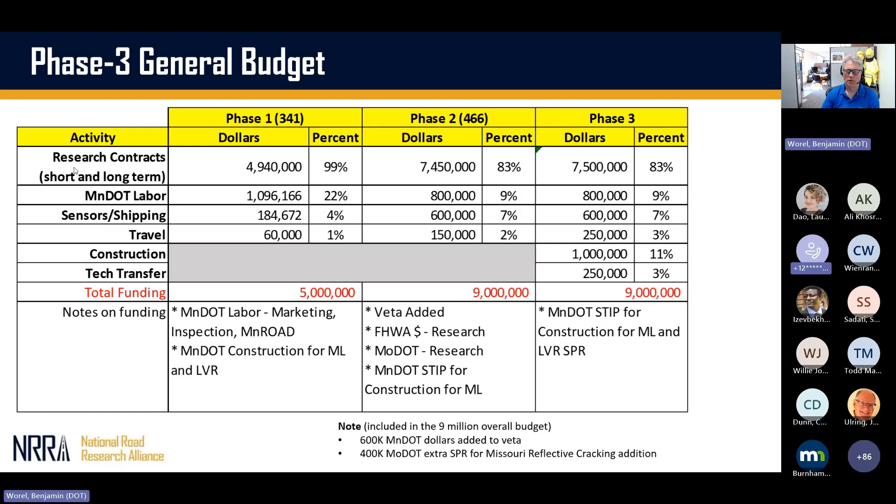The last thing I wanted to add was related to construction. We set a deadline of December 2025 for next year's construction, to get ideas in. This allows us to do contracting and different things so we're not rushing to put things together. We had a successful fall where Michael Vrtis, Jacob Calvert, and everyone here at MnRoad did a nice job pulling together different additives on the low volume road, along with a fabric interlayer, doing a reflective cracking challenge on the low volume road this fall, where the old Rejuvenator test sections were spray rejuvenators.

But we're looking for ideas for next year - again, the opportunities on the low volume road should be for 2026. We've got that type of drawing, but then for 2027, the low volume road and the main line will be opened up for ideas or construction. So that's what I wanted to mention real quick.

I don't want to take too much time because there's some good stuff to be shared through the teams. Anything else, Tom, you want to add, since you raised your hand a little while ago?

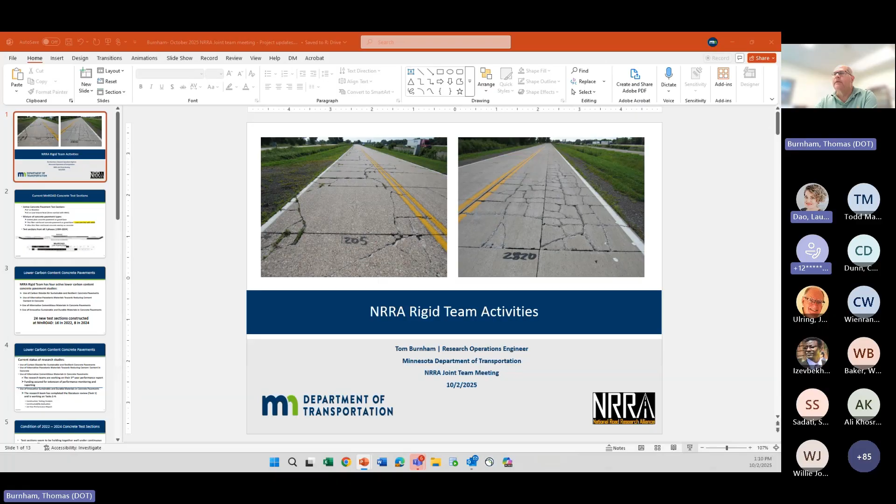Hey Tom, you're not in presentation mode. Oh, no. I forgot to add some - why Tom's doing this, I want to go ahead.

Thank Caterpillar too for the asphalt paving, and the different companies we worked with for paving those test sections.

You know what, we could go to the PM if you wanted. Yeah, why don't you do that? And let me get - okay, my - let's system. Go to the - sorry about that. Let's go to the PM. Yeah, all right.

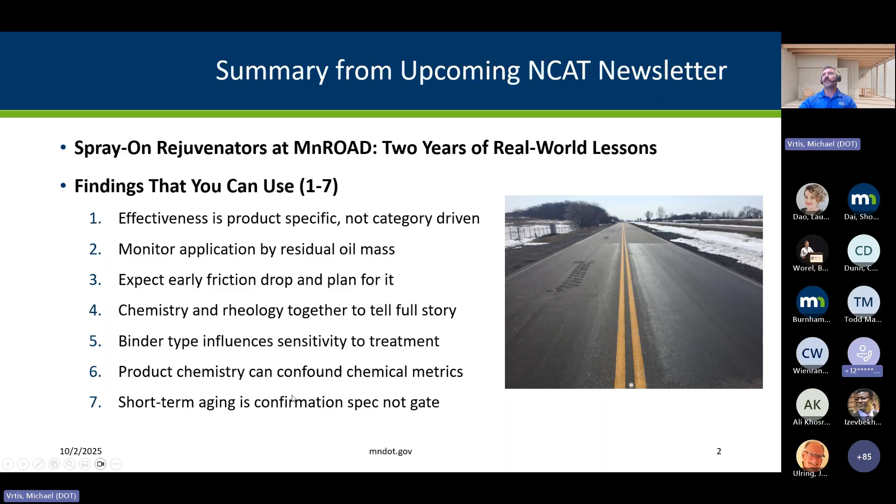Binder types, I just covered that one. Product chemistry can confound chemical metrics, I'll talk more about that on the next slide. And short-term aging is a confirmation spec, not a gate.

How to use on your next project: specify residual oil mass, use two-stage acceptance, plan for safety, match product to site, and then back to the chemical indices. Interpret with awareness of solvent effects, and avoid overemphasis on SARA fractionation.

SARA fractionation, the saturates, aromatics, asphaltenes, and resins, uses a solvent to break up the asphalt into those individual components. That solvent has an influence, especially with bio-based binders, on the breakdown and how each of those individual components are sorted out. So use complementary indices or indicators like FTIR.

I really liked the bottom line summary, and I apologize for reading this word for word, but I think it's well said. Spray-on rejuvenators can extend surface life, but success depends on matching product and retained dose to the pavement and verifying performance over time. Focus specs on residual oil mass, plan for early friction management, and evaluate chemical and rheological behavior together. With these steps, agencies can turn a promising treatment into a reliable preservation tool.

So again, thanks to NCAT and Hoegh for the work on this project and all the participants, and I'll turn it back over to Joel.

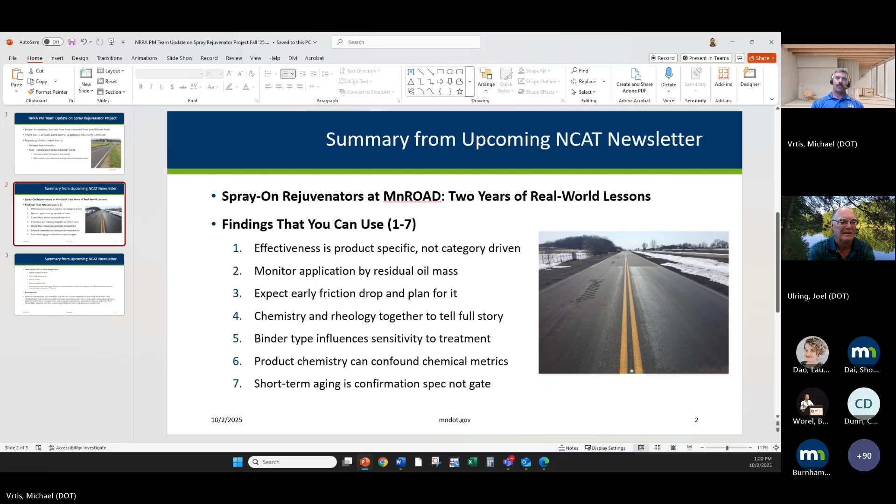I'm fine if there's short questions now. Otherwise, I think any longer discussions we should hold. Sure, but we do have time for a couple of short questions if anybody has any. All right, hearing none, we'll move on.

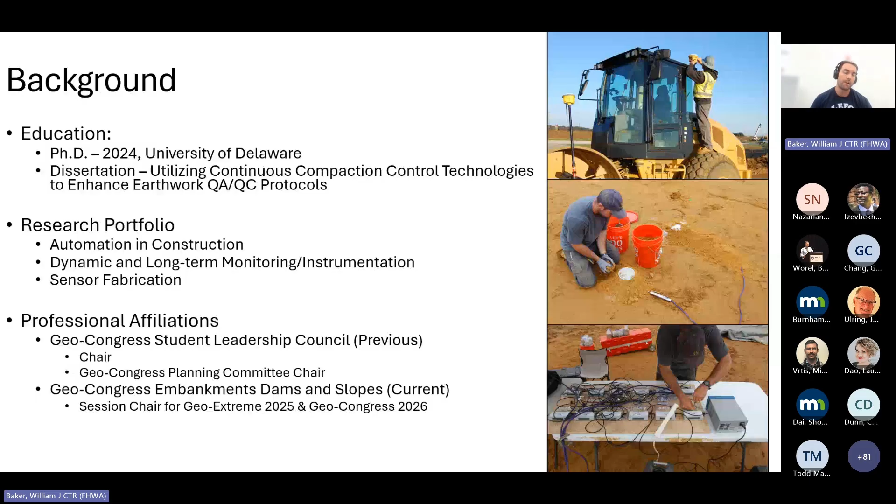In terms of other service activities I've been involved with while in grad school, I was part of the GeoCongress Student Leadership Council, both as chair and the GeoCongress planning chair. I'm currently on GeoCongress's EDS committee, where I've been a session chair for 2 upcoming conferences.

Today I'm just going to talk about one of the studies from my dissertation. It was looking at emerging technologies for assessing soil lift thickness during the compaction process. It's building off of a previous study that my PhD advisor, Dr. Chris Meehan, did back in the early 2010s when he was first looking at CCC technology. So I just want to give credit to Chris, where essentially the study we did during my dissertation is building off of the idea he had back in 2013.

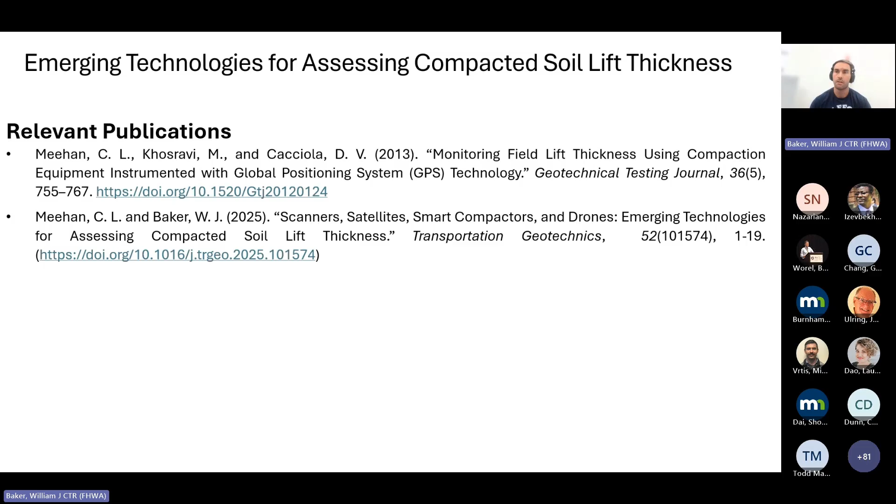If we look at it from an earthwork QA/QC perspective, lift thickness control is pretty much in all specifications, whether method-based or end-product-based, and it's really to help optimize the compaction process. Very generally, if lifts are too thin, we're reducing the efficiency of the construction process. And if lifts are placed too thick, then we could run into issues of under-compaction during the compaction process.

So my PhD advisor, during his initial CCC studies back in the early 2010s, postulated the idea: well, we are getting GPS measurements from the roller. Obviously most of the literature has focused on relating the machine response, whether CMV, KS, eVibe, to localized stiffness measurements, LWD, FWD, and so on. He was saying, why not try to augment this technology and also use it to look at lift thickness, but in a more continuous sense, over the entire project area.

So essentially the study we were looking at was validating the accuracy of CCC technology for lift thickness, but also looking at other emerging technologies as well.

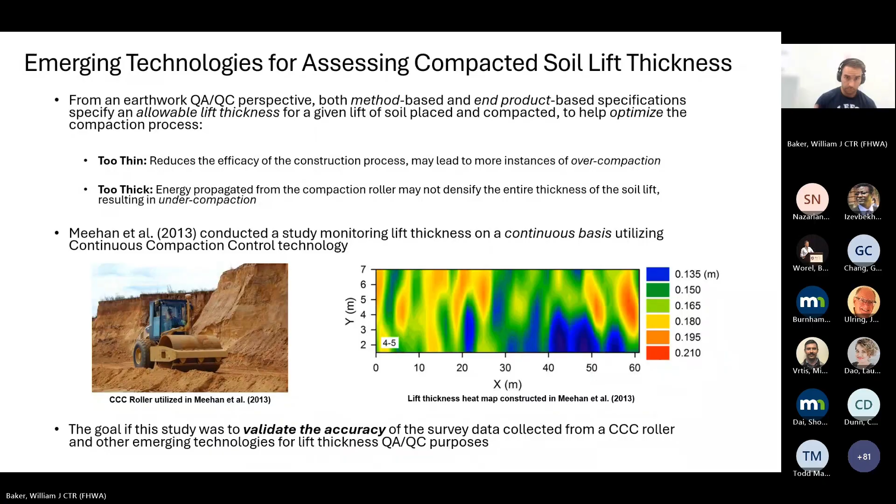The project site for this took place along construction of US 301 in Middletown, Delaware. We were looking at a specific section, and we constructed a test pad along a stockpile where the contractor was placing fill.

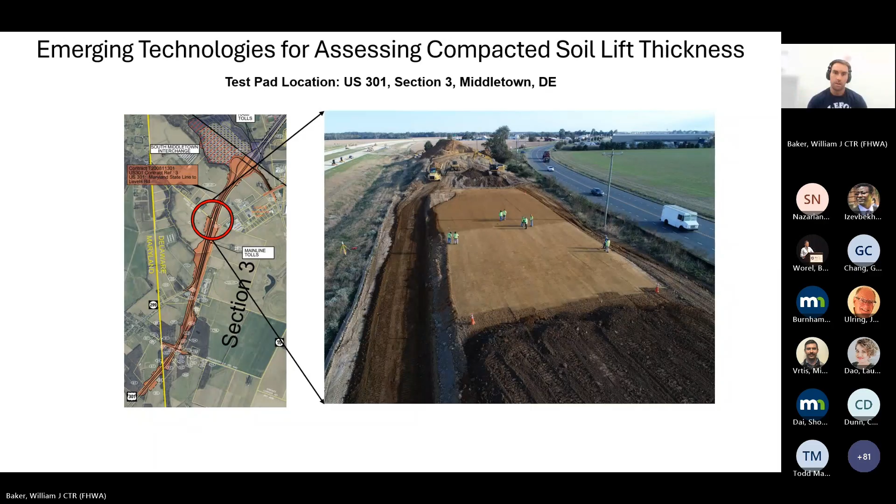The general study layout: essentially we had 2 test grids, each grid had 41 of these discs, which I'll talk about in the next slide. These are steel discs used by the MIT scan lift thickness scanner. You typically see that device used for pavement core applications, but essentially we were using it to also assess soil lift thickness.

So essentially we had 82 control points where after we place a lift on top of all these discs, we could verify the thickness. The 2 grids were to look at 2 nominal lift thicknesses, whether it was a foot or 8 inches.

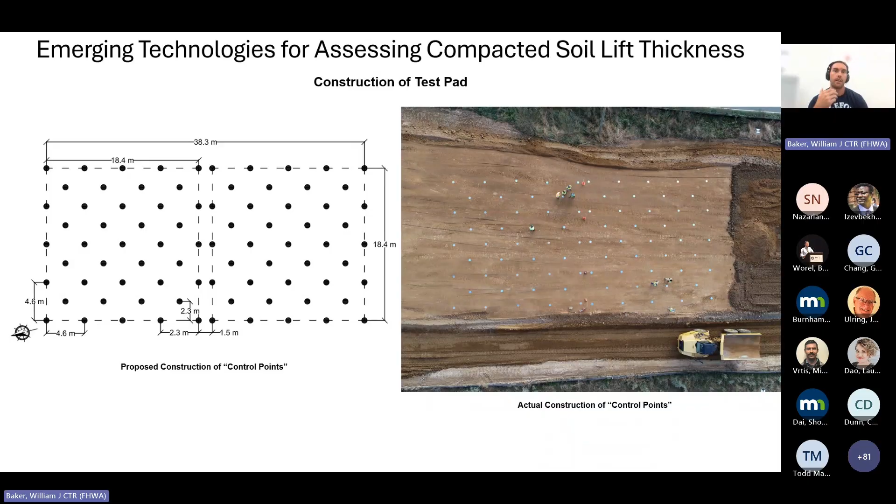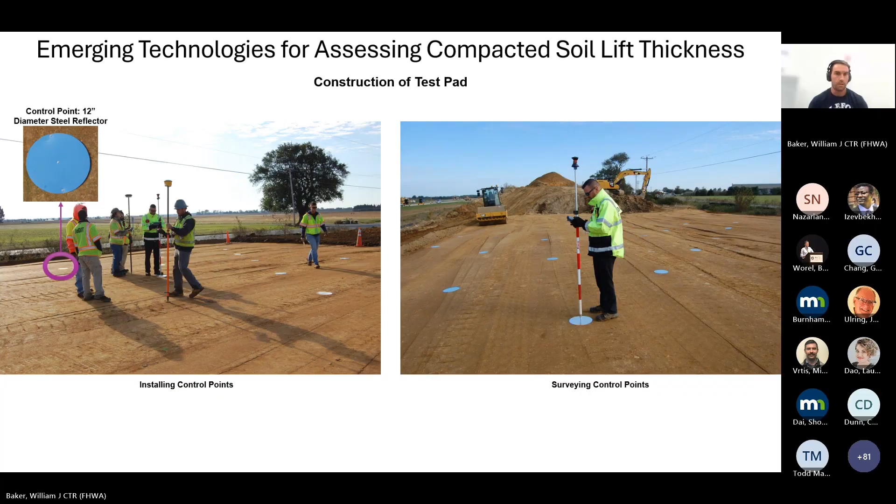During construction, all these discs were staked out because they were already programmed into the GPS. They were nailed, and then all the discs were surveyed with traditional RTK GPS and total station. So just some pictures of the construction process.

All the discs were laid out, and then the contractor put down fill and graded everything. Once everything was graded and compacted, everything was resurveyed with all the survey equipment as well.

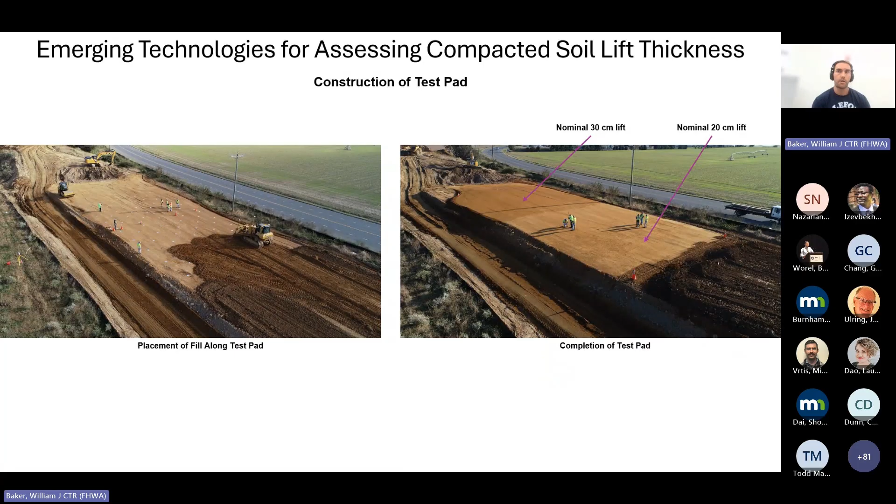The goal was to look at a lot of different technologies, both new and old. If we look at traditional survey, we had RTK GPS, total station, and the MIT scan lift thickness scanner, and some more emerging technologies.

We had the GPS from a compaction roller that was integrated with a CCC kit, and we also flew a drone and used photogrammetry to back out those photos to get 3D survey data.

With both the roller and the drone, the base was surveyed before they put down the lift, before we laid out all the discs.

With the roller, we just did a static proof roll because we didn't want the vibrations to affect the readings from the GPS. Same thing with the drone - it flew before we placed the disc, and then after the lift was placed and compacted.

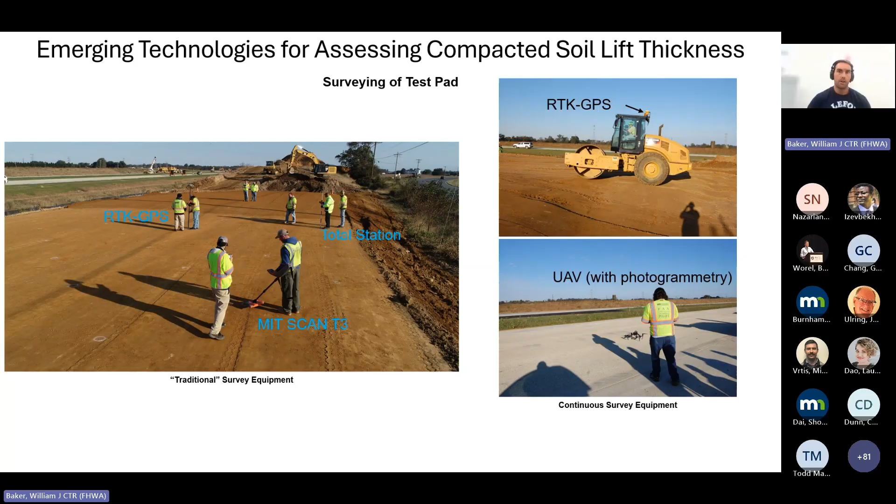We're looking at all these different technologies, but with this type of study, the analogy would be if you did this along a pavement field, you would truth everything against pavement cores. In the context of soil lift thickness, to truth everything, which you'll see on the next slides, we dug down to each of these 82 locations.

Because these discs had a center nail, we physically measured the thickness along all 82 of these locations so that we could verify the thickness, or truth everything to one standard measurement.

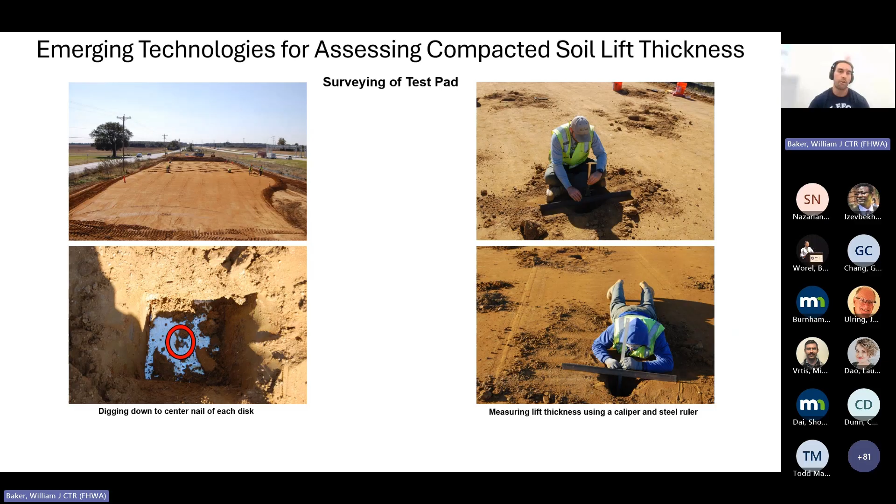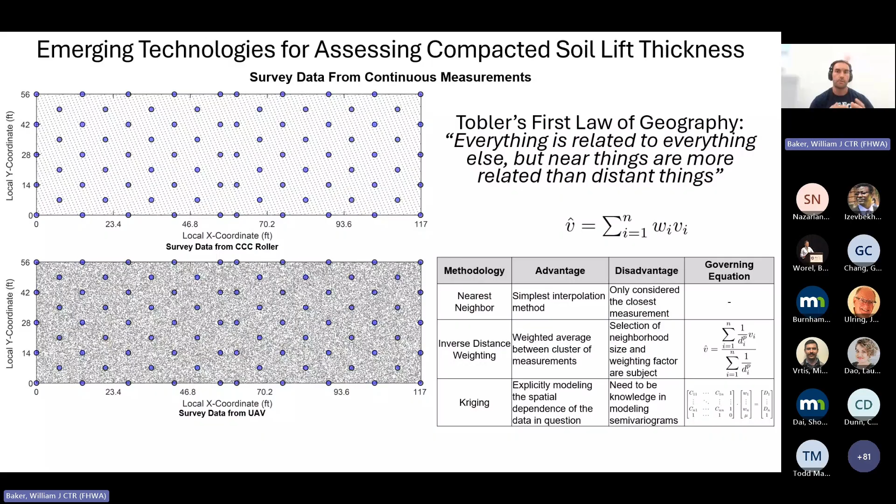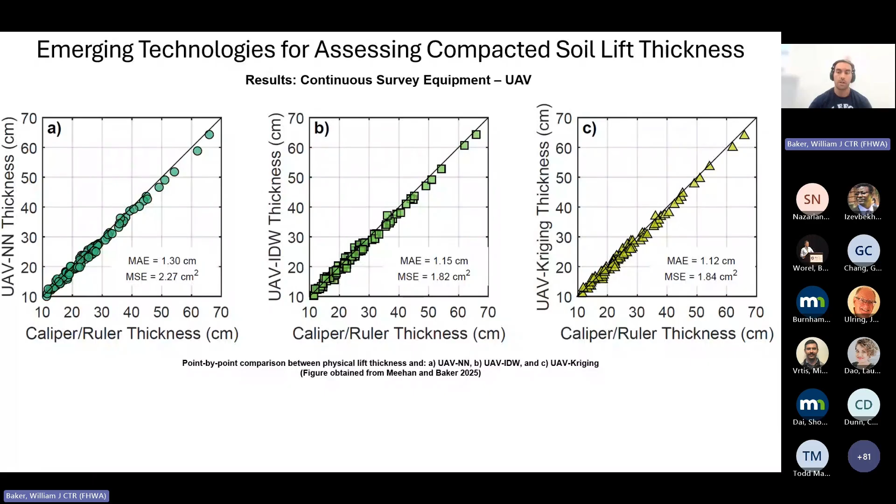That's probably because you're getting a much denser point cloud relative to the GPS from your roller. And again, it was also more accurate than the GPS from your roller. This sort of looks at everything, the accuracy of each device all together.

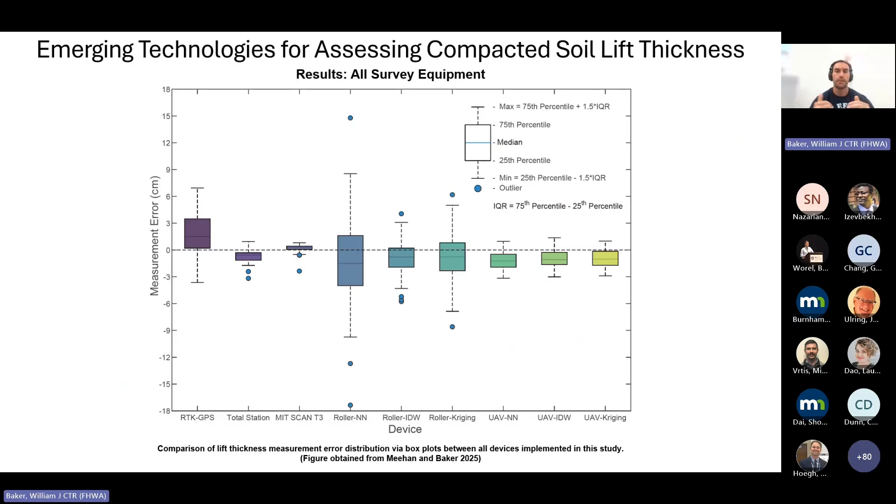So you can obviously see that the MIT scan T3 was the most accurate out of all the methods that we looked at. And then you can also see how the UAV measurements are relatively consistent across interpolation functions.

And again, this sort of summarizes everything. Really, the biggest thing you can look at is just the rankings on the left. So obviously, MIT scan T3 performed the best, followed by total station, and then actually UAV surveying in conjunction with kriging was the 3rd best method in terms of assessing lift thickness.

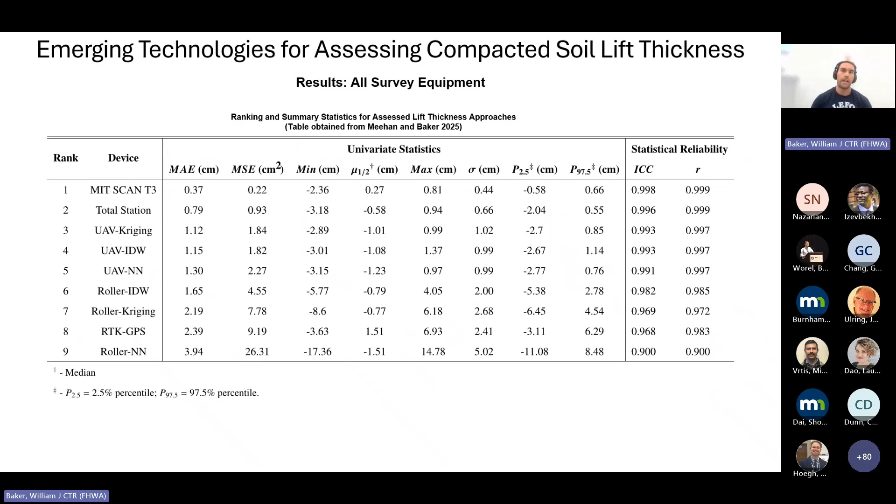So more importantly, instead of looking at these plots as heat maps, you can look at them as a QA/QC heat map, where depending on the project and your tolerances, you can look at areas that failed because they're too thin of a lift after compaction, or areas that are too thick after compaction. But generally what I'm trying to show, rollers on the left, UAVs on the right, is that essentially they're telling the same story. And then the argument would be within a production environment, the same decision is going to be made regardless of whether it's from the GPS from a roller or from a UAV survey.

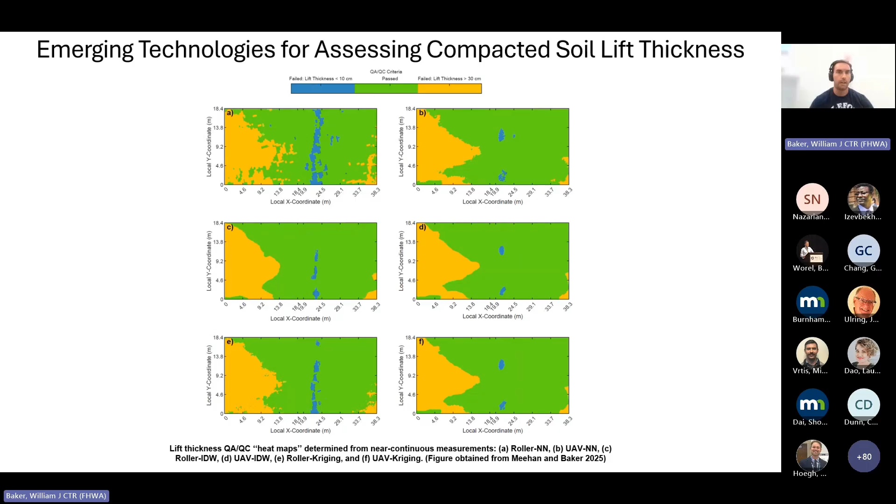So again, just to summarize, on a point-by-point basis, the MIT scan T3 was pretty accurate for assessing soil lift thickness on a more continuous basis. UAV performed better than the GPS from your CCC roller. However, qualitatively, looking at things in terms of heat maps and QA/QC heat maps, the CCC roller and the UAV were consistent with one another.

And so the advantage would be that generating these type of maps is probably more real time with a CCC roller relative to a UAV based survey, because after surveying, you have to post process it, which takes more time. So again, essentially they're telling the same story.

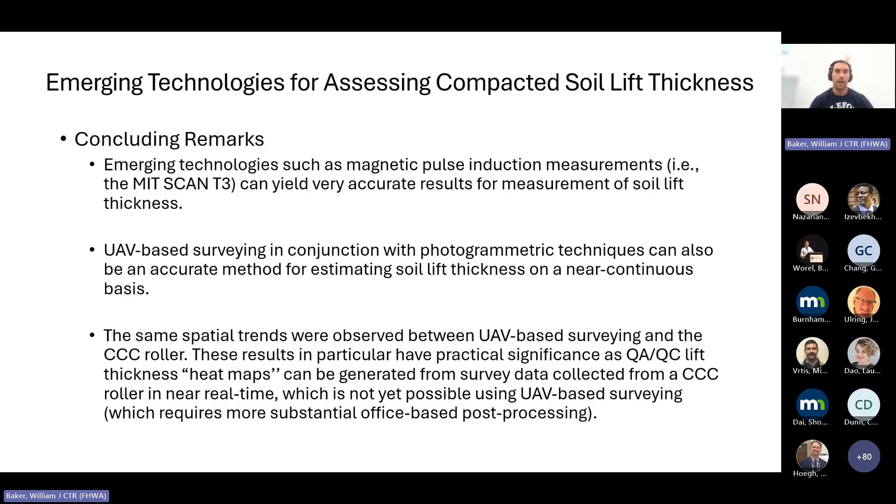And again, I just want to acknowledge that with any type of field study like this, there are a lot of people involved. And so, without these people, this project would not have been possible. And yeah, so again, thank you everyone for your time.

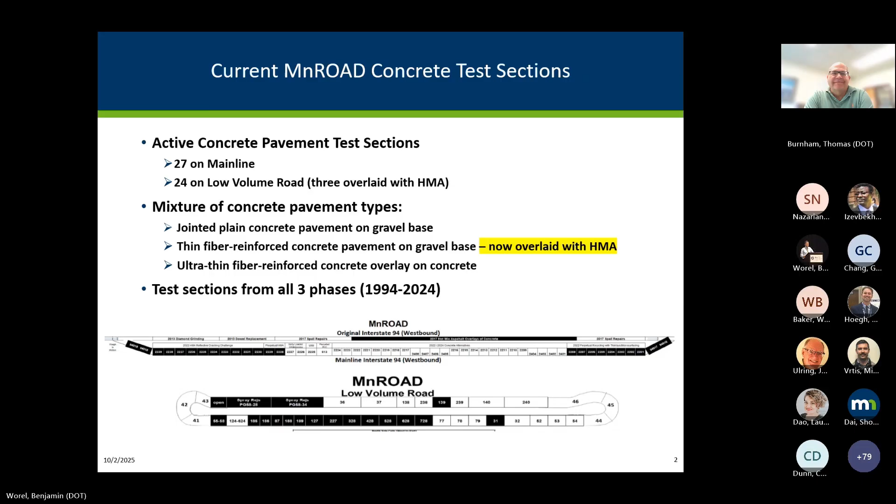It's all on you now. Can you see the slide? Did it change? See the main line, low volume road? Yes, okay, great. Now this is where you talk, next, Tom. Yes. Next slide, next slide.

All right, so yeah, I was saying we have 24 sections we're monitoring. Next slide.

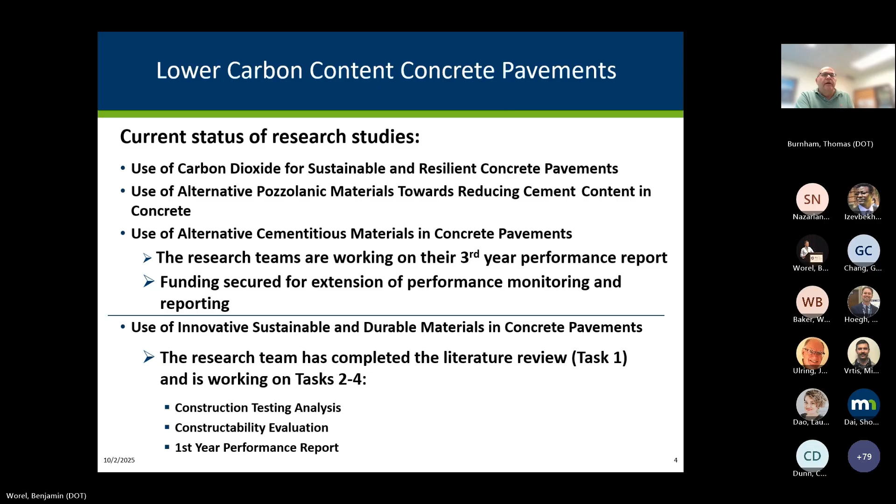Condition of the sections: so far they're holding up. Right now we have continuous interstate traffic since it's being used for diversion of constructing 3 lanes parallel, so we have not had an opportunity to go out there, and we've been exploring the possibility of trying to get a lane closure this fall.

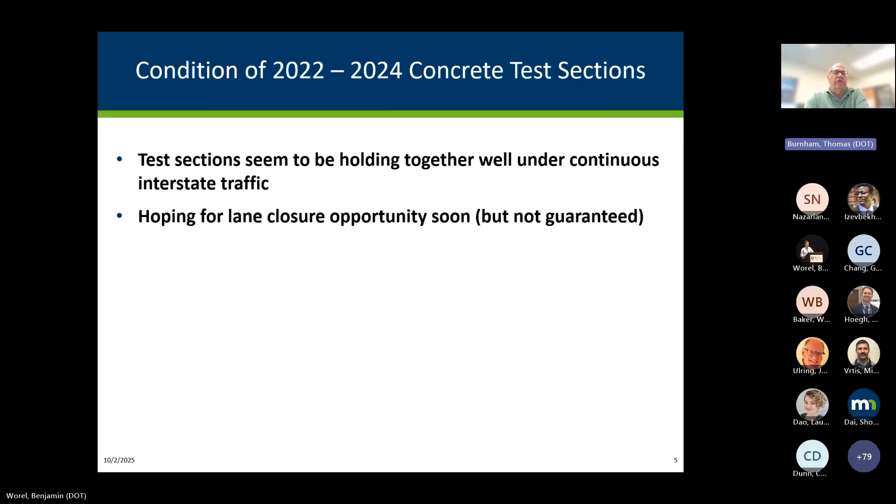Again, we hope we can at least get even a day or two out there to peek at things, take a few physical measurements. Right now, it's been mostly whatever we can collect within the stream of traffic. Next slide, please.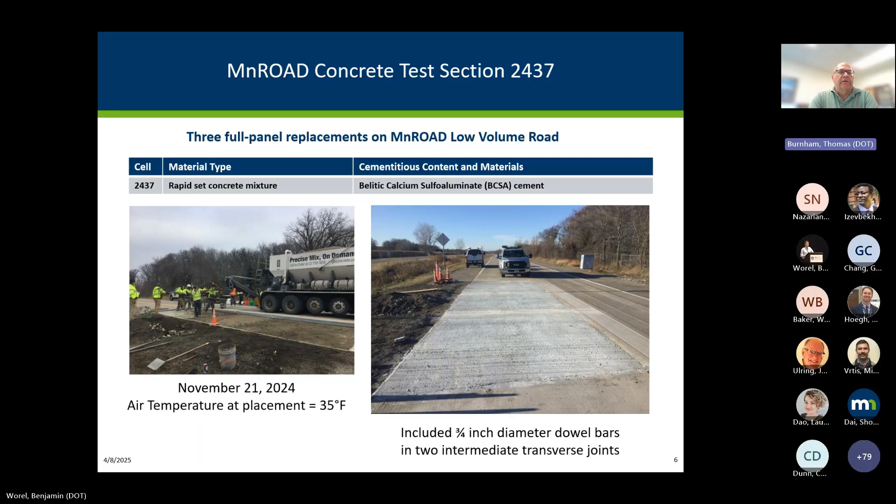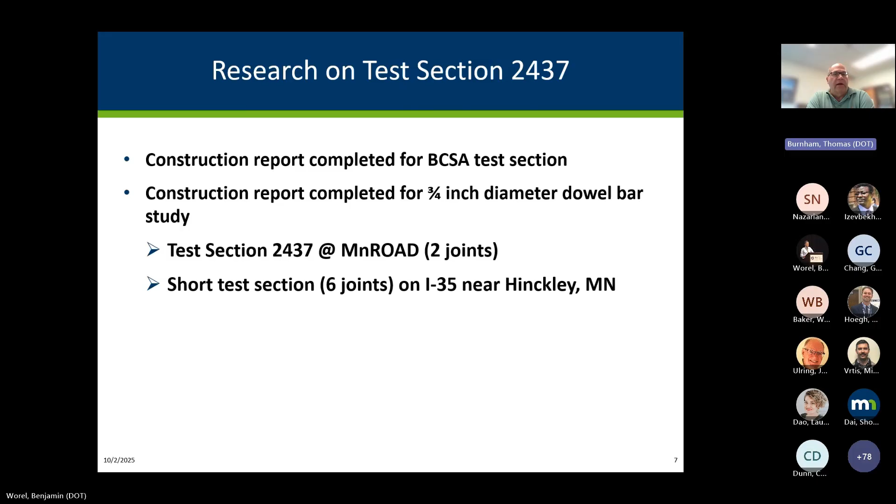Other active NRRA projects: one that me and my colleague have been working on is the use of early loading to increase joint deployment. This is about the observation that if you're building a concrete overlay on asphalt, sometimes we're sawing them at every 6 feet, and we're finding that they're not deploying for a while. Some contractors came up with the idea, what if we run like a water truck over it and see if that increases it?

So that particular study, we're now in the 2nd year performance report for the particular cells at MnROAD. There's also some other sites around Minnesota that we've been following.

The other one is concrete overlay test sections using PEM and diamond grinding. So this would be repairs to concrete overlays, and then also diamond grinding in the case that we have some faulted joints. We're evaluating the performance of the MnROAD test sections. Some of them we've lost now because we reconstructed them in 2024, however we have some statewide projects that we're continuing to monitor.

It was mentioned before that there's this automated 3D GPR analysis that we're joint teaming with the ICT team, and you've had an update on where those are at. They're getting close to some software development, I believe, and in November they're hopefully going to reveal that. Next slide.

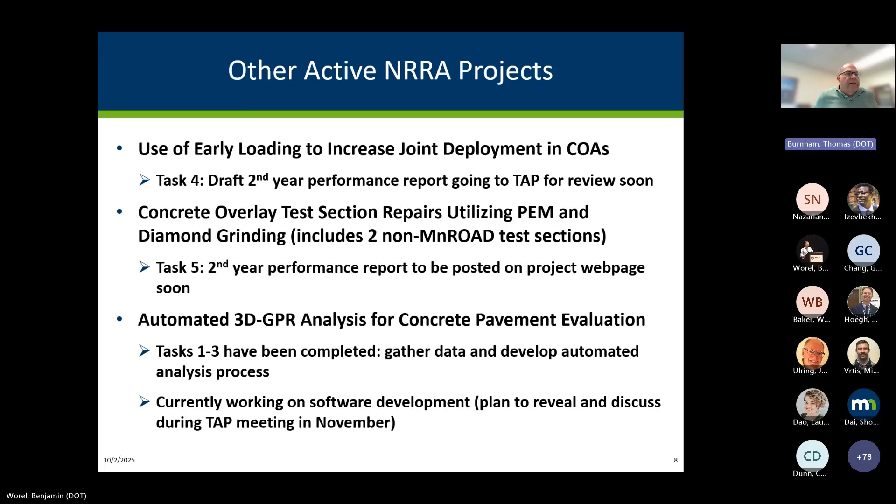We also have a project from 2024, new test sections dealing with microspheres in lieu of air entraining concrete. So we're using these microspheres, and that project is moving along. The first 3 tasks have been completed: the literature review, mix design development, and assistance with construction. That team should be working on the 1st year performance report, and I guess there's going to be a TAP meeting in January to report on what they're finding.

We also recently completed the 2024 MnROAD concrete construction activities report, essentially reporting what got put down, and that's available online. And then if Maria's on the call, she can give us an update on where we're at with the mix design and construction assistance project that Larry Sutter has been helping us with.

Thanks, Tom. This one is not online, nor is there a link to the project, but we'll work to rectify that. So Larry is working on finalizing the report. He's reached back out to the suppliers to see if we can get EPD information from them, and a little bit more about the chemical composition of their cementitious blends that they produced for us. The project was supposed to be done at the end of June, so I'm working on that, but the goal is for it to be done by the end of the year, and maybe he can present on it at the NRRA next year. We'll see.

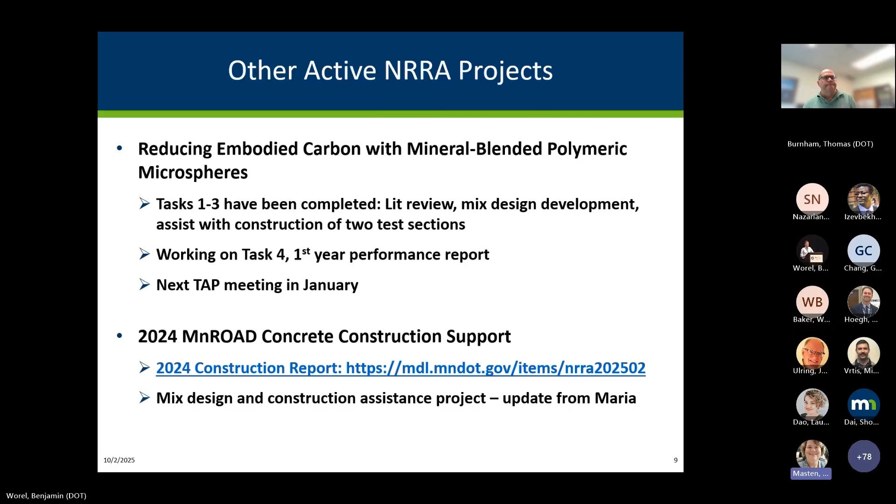Thank you for that update. Next slide. So again, if you're interested, go to our team page for projects, and most of our projects are listed. We always struggle to kind of keep updated, but you can find out a lot of what I've revealed today. Next slide, please.

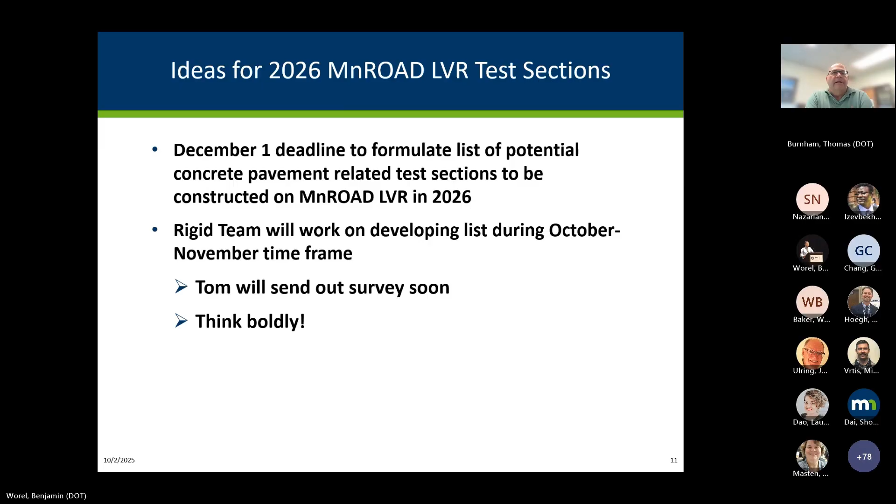And then again, Ben has put out the December 1st deadline to think about some test sections on the low volume road next year. So that's going to have to be some pretty rapid turnaround. I will be contacting people on the rigid team for ideas. As I always say, MnROAD, especially the low volume, is think boldly, because we can somewhat afford to fail, but anyway, you don't have to be as nervous as putting it out on the interstate. And that should wrap up my update.

Myself and my colleague Mike Wallace have been going out and revisiting concrete overlay on asphalt projects in Minnesota. It's been a while—I think 2018 we put our last report together, and the number of sections have doubled. Our counties are building several projects per year, so they've kind of stacked up. We're revisiting and very much focusing on some of the very early ones, a lot of them built around 2009 to 2011. So they've got some years on them, and we're very interested to see how they're holding up.

Mike Wallace is also working on developing a video and user's guide for the operation of the Mira ultrasonic tomography testing device. I don't know that too many people have those, but they're great devices—a little challenging to operate. Hopefully this will help users out in the field, so you don't have to be such an expert at it to be able to use it.

It's a great tool. And then, as I mentioned before, we're monitoring the performance of those test sections with 3/4 inch diameter dowel bars. Now I'm done. If there's any questions, feel free to ask.

Yes, Bernard. You have to unmute. I just pasted in the chat the 3/4 inch dowels report.

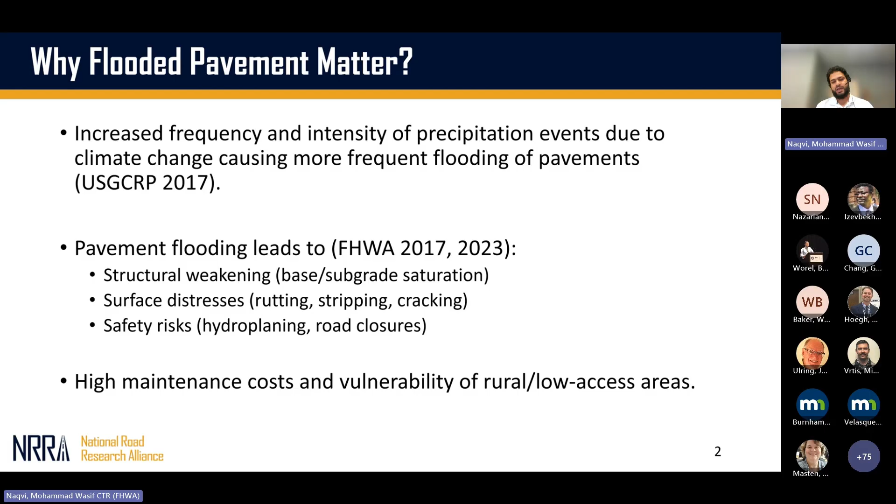Surface distresses like rutting, stripping, and cracking can also be accelerated because of flooding in a pavement. Ultimately, this all leads to high maintenance costs and accessibility issues in some areas, especially rural and low access areas. This issue is particularly more problematic in coastal areas and also low-lying areas as well. So what are the current practices?

There are different practices used by DOTs. Some of them just do visual inspection and quick surface checks to see if the pavement can be opened again after flooding. Some of them use LWD and FWD after floods to see if the road can be reopened again, and whether it has enough strength and stiffness after the flooding to be operational. There are also load restrictions that are implemented sometimes in these cases when the pavement is recovering from flooding.

So basically, we have a lot of these limitations coming because of the lack of research. There is no standardized criteria for when we call the pavement flooded and when we call it recovered. How long does it take for the flooded pavement to recover? There is also a lack of layer-specific data - how long does a particular layer take to recover, like base, subbase, and subgrade, and how does it react to saturation? The other issue is predicting the time to drain and stiffness recovery.

Time to drain is basically the time it takes for a layer to get rid of the water. This can be different, like whether you want to get rid of 50% of the water in the layer or 100%. This concept has been used by the federal highway in the past, but it's not really implemented much by the DOTs during design or during construction.

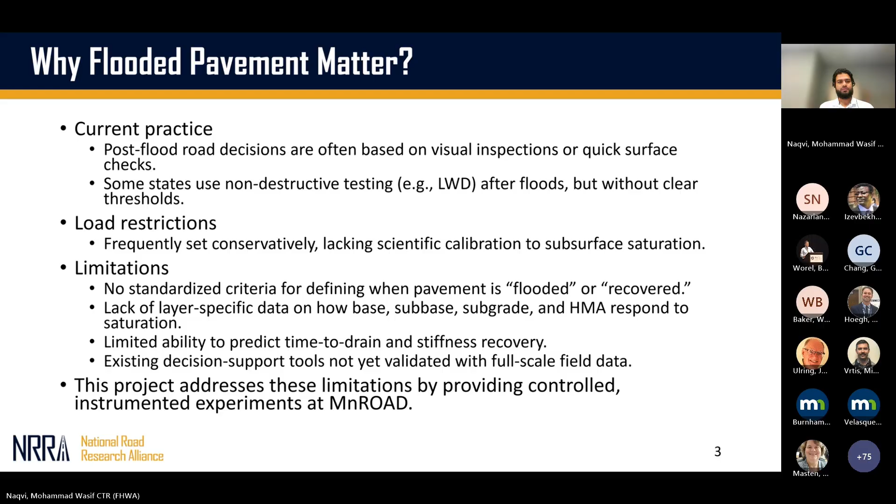From a recent report titled Pavement Resilience by FHWA, they also talked about these gaps and research needs to make pavement more resilient. They identified issues associated with flooded pavement, including the need for better design of the base and sub-base layers to increase structural integrity, especially in areas subject to inundation.

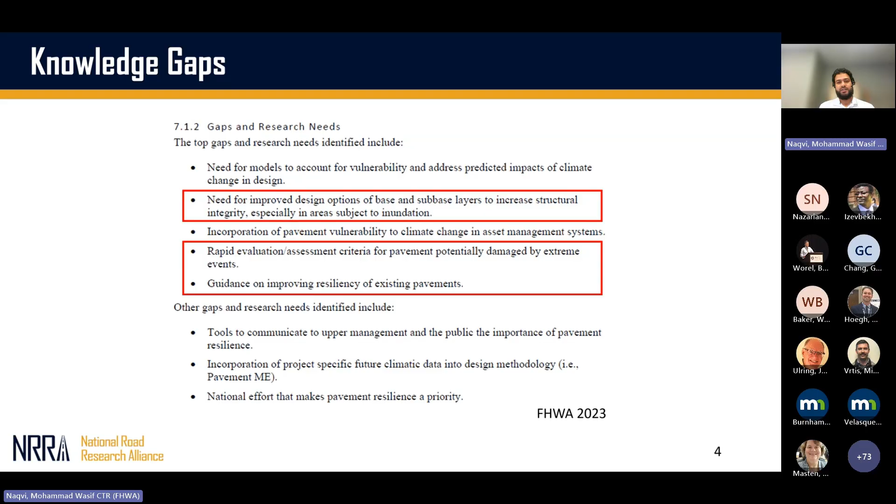We need rapid evaluation and assessment criteria, which is where the time to drain and recovery of stiffness aspects come into the picture, and how we can improve the design to make the pavement more resilient, especially pavements which can be subjected to flooded conditions. There have been knowledge gaps identified very recently regarding flooded pavement research.

Like I said, we are still developing this project - we're in the development stage. We are still trying to figure out what questions we can answer, what questions are related to this problem, and how many questions we can answer with this research. Some of the questions we have agreed upon include: how long should pavement remain closed after flooding?

So how does it basically connect to how long it takes to recover to its initial stiffness, or whether it can actually recover to its initial stiffness ever, or if the damage is kind of permanent.

How do different layers, base, sub-base, subgrade, react to saturation? What is the time to drain and stiffness recovery? Is there a particular threshold of flooding duration after which the pavement just cannot recover anymore and the damage is permanent?

What rehabilitation strategy can we use to make the pavement more flood resilient? Can we use field measurements like LWD, FWD to identify when the pavement is fully recovered? And also apps, like the recently developed flooded pavement app from this project, can we use that to identify when we can open the road again for traffic?

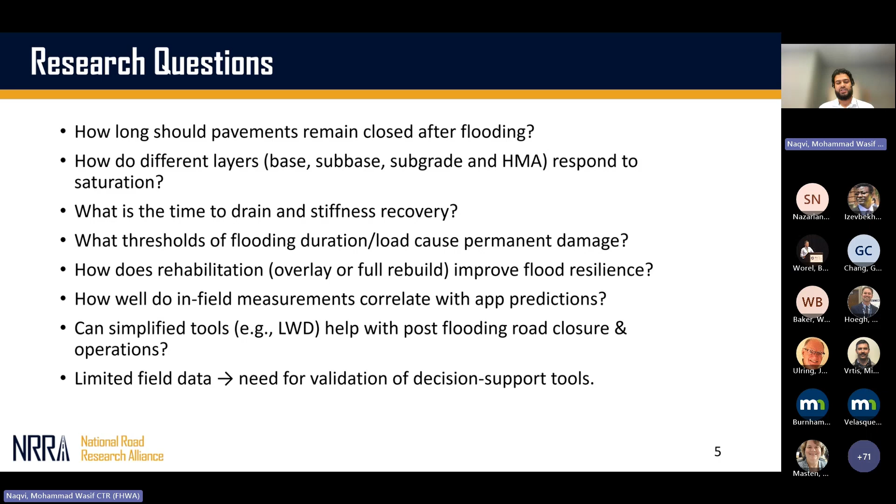So there is a lack of field data related to this area of research. That's why we need research done in this area. We are still developing and drafting the work plan right now.

Initially we identified three phases of the project. We're going to use a stockpile area with cell 83 and cell 84, which were used for a study done in 2007 for some husbandry equipment research. The idea for phase 1 is to work using the existing section, constructing trenches and dikes around it to hold water during flooding.

We had a long discussion about how to simulate actual flooding in the pavement, and we agreed upon a bottom-up flooding approach, which is more representative of what happens in the real world. So we're installing structural and environmental monitoring sensors, then saturating the pavement, and conducting field testing to generate data and results.

In phase 2 we mill and overlay these sections, since they're in pretty bad shape right now, with a new HMA layer, and repeat the same process: flood the section, apply loading, and test the time to drain and stiffness recovery. In phase 3, the idea is to construct these sections from scratch using new design concepts learned from phases 1 and 2, with sustainable materials to make the pavement more resilient to flooding, then simulate the same full suite of flooding and testing scenarios.

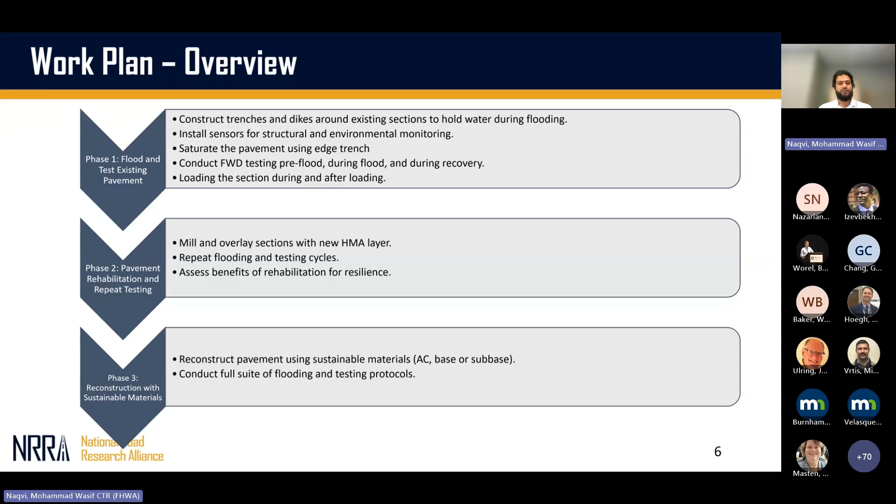So Ben and Jacob's team just started constructing these test sections. We agreed upon having trenches on both sides of the cells, about 1.5 feet wide, going into the subgrade so we can fill them with water and let the subgrade, base, and subbase saturate from both sides.

Since flooding can also impact the asphalt layer, the top layer, we decided to keep at least 1 inch of water sitting above the asphalt so we can evaluate flooding's effects on that layer as well. We'll use valves and a sump to control flooding and drainage.

We are still talking about what sensors we can put into these sections. Since this is a study about moisture and flooding, we'll definitely be putting in moisture and suction sensors, and we're still discussing other instrumentation, if not in phase 1, possibly in phase 2. The idea is to instrument it as much as possible to get as much data as we can.

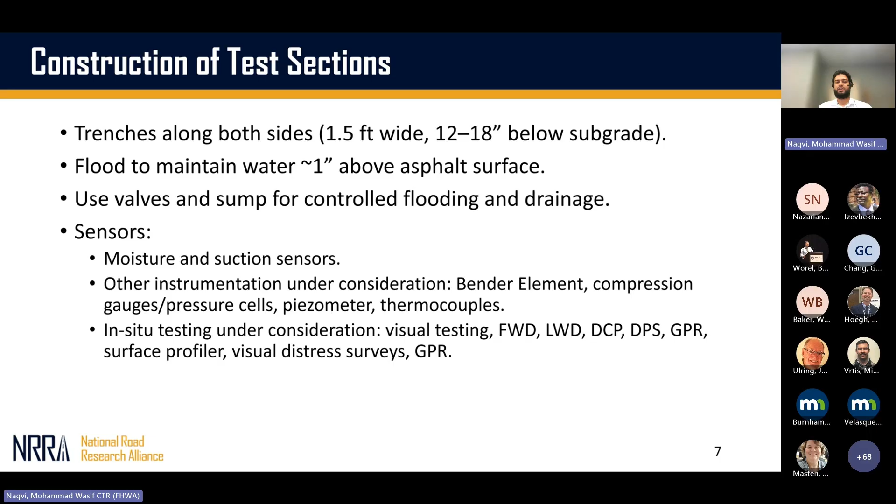We're considering some new sensors, like the Bender element, which gives you a shear modulus and can help evaluate how long it takes for the pavement to recover its initial stiffness. We're also evaluating in-situ testing options for this project, like visual testing, FWD, LWD, and a bunch of other tests. We're still developing a work plan to identify which tests are most relevant.

So this is the existing test section. It is near the stockpile area, as I understand.

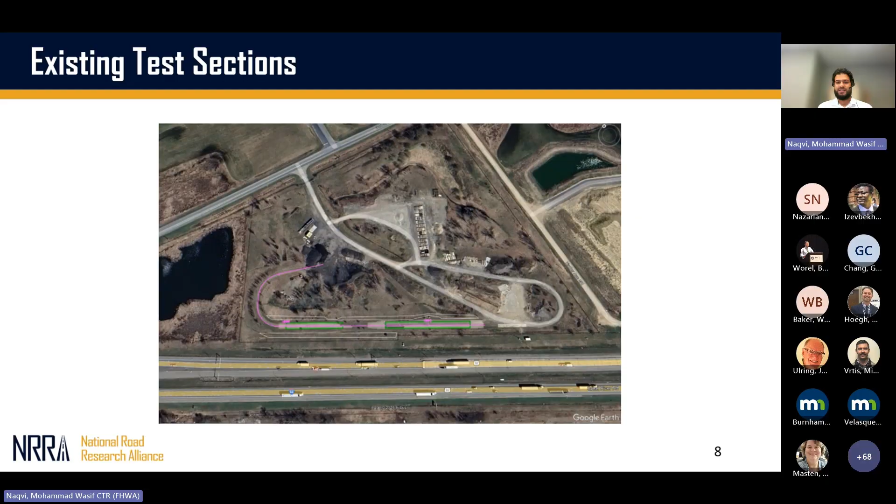So it's near the stockpile area. We had 2 sections, cell 83 and cell 84, which are highlighted in green here. They are reconstructing and modifying these test sections so that we can simulate flooding scenarios. Cell 83 and cell 84 were used in the past for another research project a long time ago.

For phase 1, we are particularly focusing on cell 83 because we are trying to get this constructed as fast as possible to do some flooding by next spring. Cell 83 consists of 3.5 inch of asphalt layer with 8 inch of base and a clay subgrade.

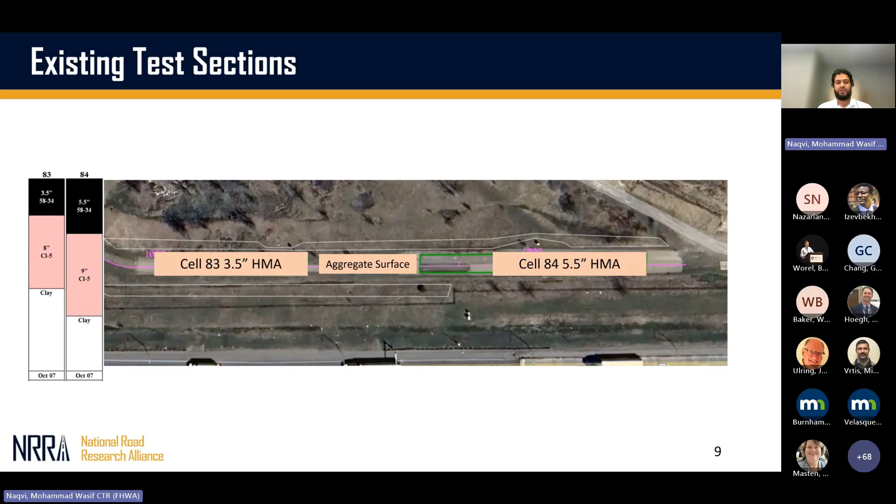Ultimately the idea is to use this whole strip, have multiple sections, and do some flooding in phase 2 and phase 3. This is the existing condition of cell 83 near the stockpile, and this is how we are working on construction of the test section.

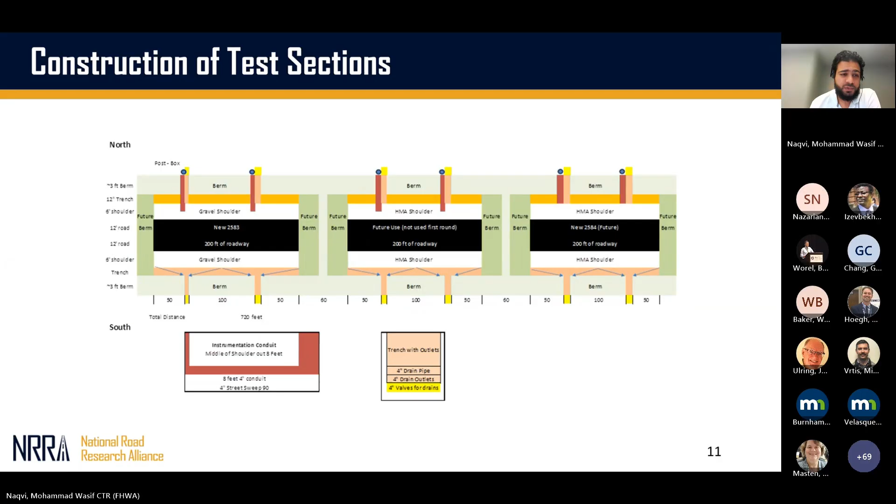Jacob can elaborate more on this if you have questions, since he is taking care of the construction part of this project.

This is the profile of the test section cell 83. We have lanes, then shoulder, and right after the shoulder we have a trench, which we will fill with water to simulate flooding. After the trench, we have a berm to prevent the water from going to the sides, so it travels towards the pavement, not away from it.

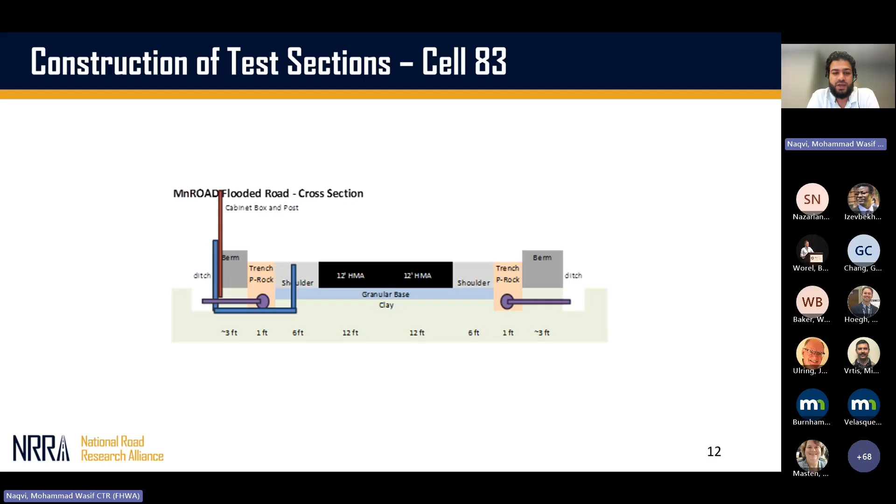As I said in the beginning, we will have valves to control the flooding and drainage. Up to some point we will flood the pavement so the layers can saturate completely, and we'll load it and do some testing. But ultimately we want this water to go away to evaluate how long it takes for the stiffness to recover. These trenches will help us do all those things.

These are some construction updates. Jacob and his team have been working hard to get these sections built up, focusing on cell 83 right now, which is 200 foot of section with trenches on each side. They already excavated trenches for cell 83 and filled it with drain tile and coarse filter aggregate.

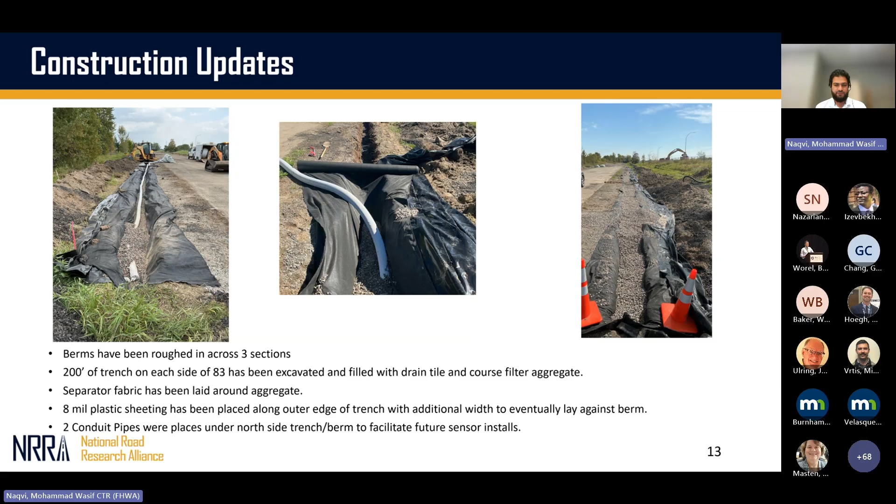We are also putting fabric to prevent material intrusion, and another 8 mil plastic sheeting along the berm. The idea is to force water to go inside the pavement and not allow it to go away from the pavement. Then we're using pipes to facilitate sensor installation.

In 2025, the goal is to get the shaping of the berms around cell 83 done, then place the plastic sheeting against the berm, and cover the plastic sheeting with aggregate material. They are also regrading the ditches, where we're going to install a collection and pump basin, and regrade the aggregate shoulder of cell 83.

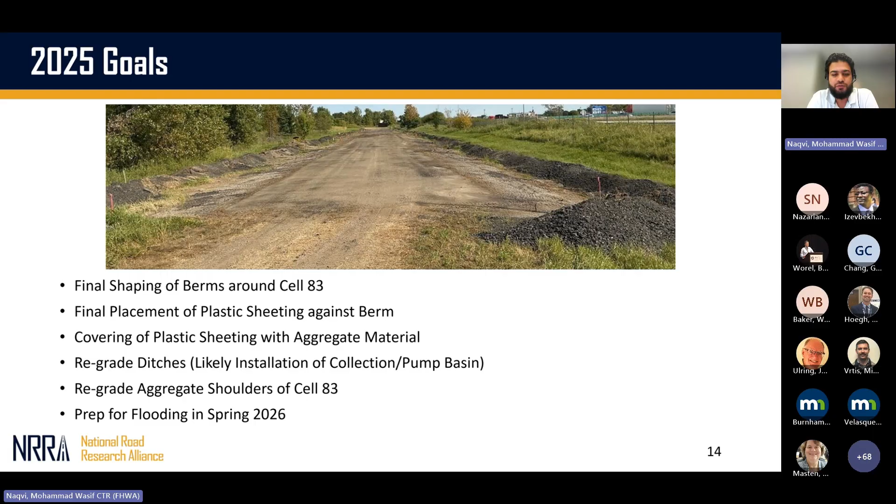Ultimately, the idea is to get this section built in 2025 and have a strong work plan by then, so we can flood this in spring 2026.

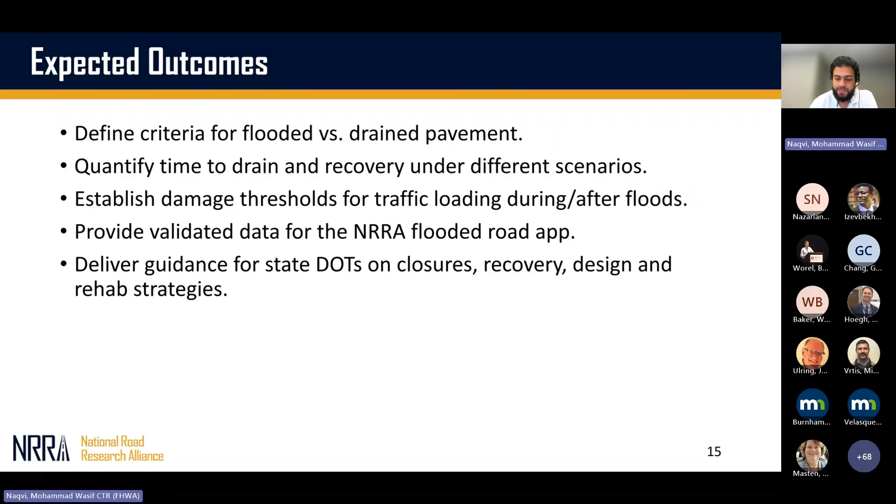Some expected outcomes from this project: we would have a defined criteria for when we call the pavement flooded and when we call it completely drained and recovered. We can quantify time to drain and recovery under different scenarios. We can establish thresholds for how much loading is allowed when the pavement is flooded, during, and after flooding. This section will also help us validate the NRRA flooded road app. Ultimately, the outcome will help state DOTs on closures of flooded pavement, their recovery, and design and rehabilitation strategies. These are some references, and that's all I have.

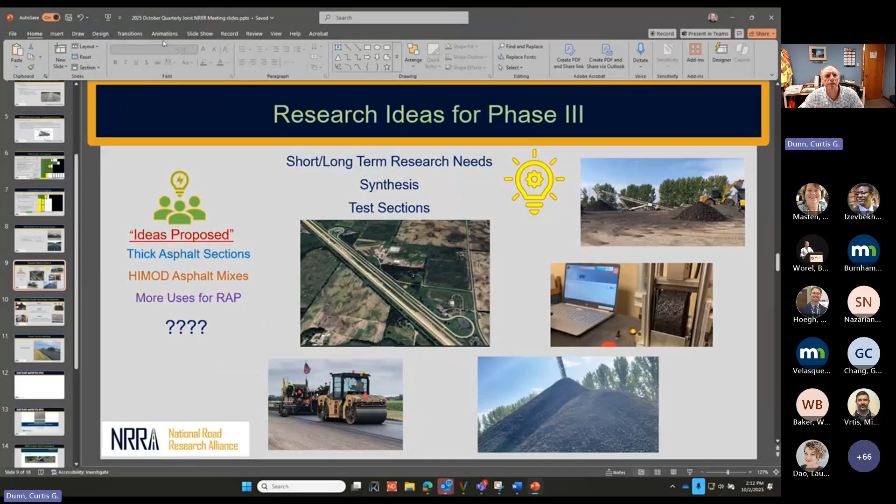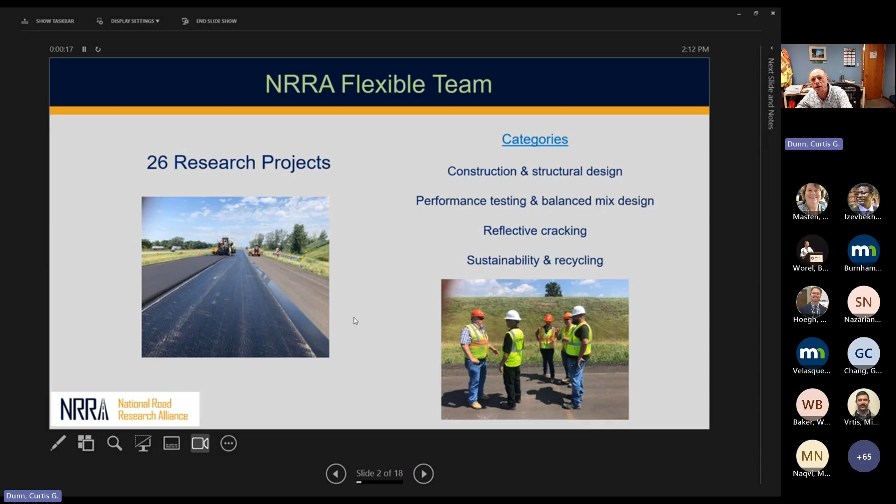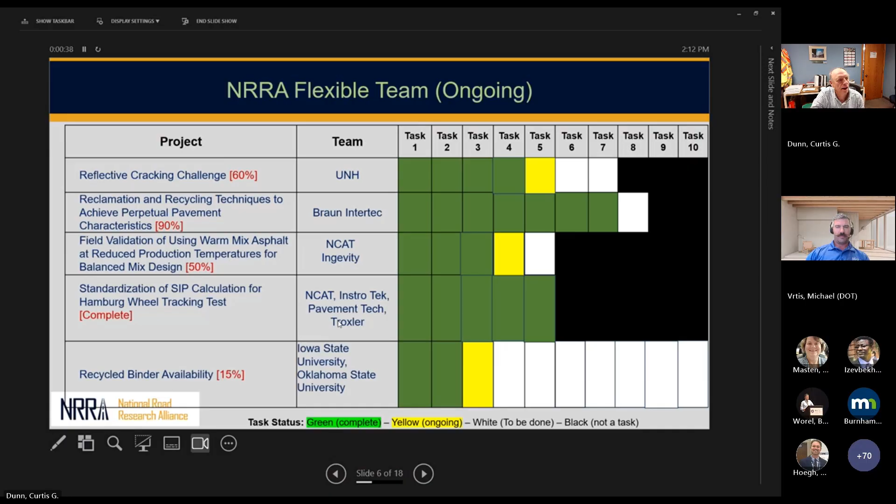The flexible team has about 26 projects currently, and about half of them are listed on the website, and about half of them are completed now. We've also got about 4 co-sponsored projects going on, about 8 projects that are exclusively flexible team projects, and also some developing projects that are waiting for the green light to get going.

I just wanted, before we have our highlighted project here today, to mention the research needs we're looking for. There's a lot of exciting things happening right now on the MnROAD test track on the low volume road with the reflective cracking study, to build upon and expand what we did in 2022 with the reflective cracking NCAT additive group reflective cracking study challenge. So that brings me to a shout out for research needs and ideas we can think up for the low volume road.

It would be nice, maybe at the next meeting, to spend some time doing some brainstorming on how we could come up with some interesting ideas. We've got some ideas there to the left that have been on the shelf for a while, like thick asphalt sections, HIMOD asphalt mixes, and other things like maybe more uses for RAP. There's just about everything we're researching now where RAP kind of comes into play.

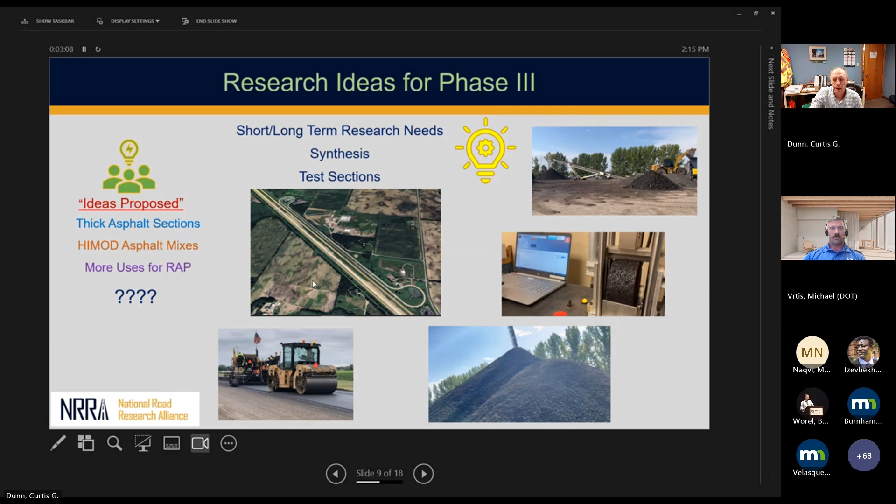With that, we're going to highlight one of our flexible team research projects. The one we're highlighting today is the validation of loose mix aging procedures for cracking resistance evaluation in balanced mix design. The presenter is Dr. Fan Yin, Assistant Director at NCAT. Fan's research focuses on balanced mix design, sustainable pavement materials, and advanced asphalt material characterization.

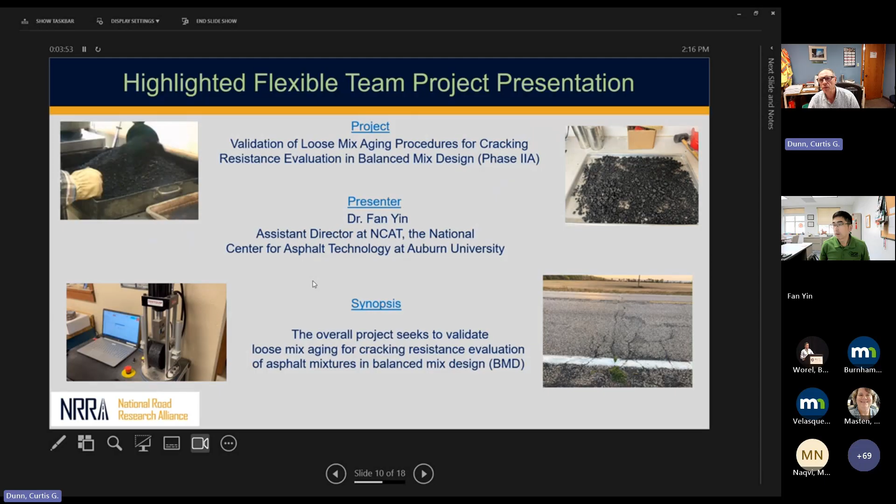The synopsis of this project is that it seeks to validate loose mix aging for cracking resistance evaluation of asphalt mixtures in balanced mix design. So Fan, if you're ready to go, I'll stop sharing. Okay, all right, sounds good. Thanks, Curt, let me share my screen.

Okay, let's see if that works. All right, can y'all see my screen okay? Yes. Okay, all right, sounds good. Well, good afternoon everyone, thank you for joining the NRRA meeting.

Great to be on the agenda to talk a little bit about one of the projects we're doing at NCAT. As Curt introduced, the title of the project we're working on is the validation of loose mix aging procedures for cracking resistance evaluation in balanced mix design.

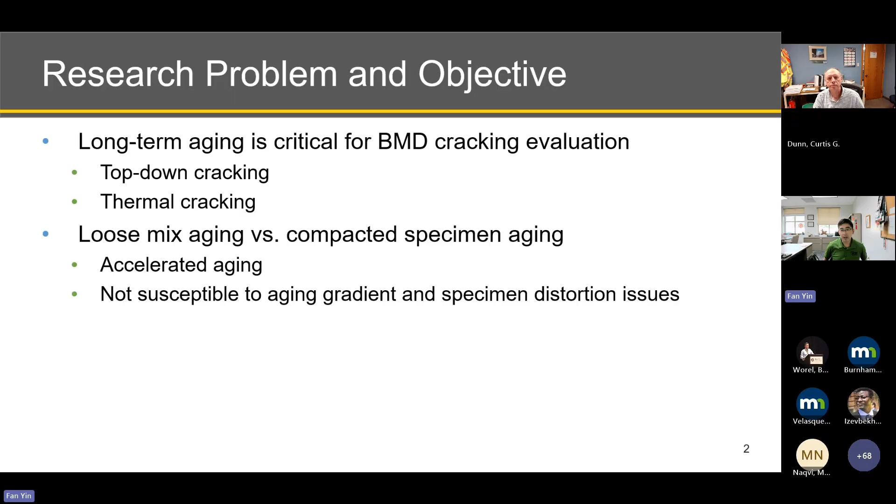If we look at where we were, right before 2024, AASHTO R30 was really the guidance on the national level regarding how we should handle aging for mechanical or performance testing. The general consensus is that for routine evaluation, we want to use short-term aging, but for cracking evaluation, we need to look at long-term aging for different reasons.

One reason is that cracking does not occur right after construction. It occurs, in many cases, several years after the mix is placed in the field. And we know aging is really not the friend of cracking performance, because after aging, the material becomes stiffer, more brittle, loses some relaxation properties, and becomes more susceptible.

If we look at the recommendation at that time in AASHTO R30, the recommended procedure was compacted specimen aging for 5 days at 85°C. There has been some challenges associated with that procedure. One is the long duration of 5 days. It may not be a big deal from the mix design phase, but if we try to incorporate that during production, it can be very challenging because of the long duration of that procedure.

Another issue is that because we are doing the aging on compacted specimens, we make the specimen susceptible to aging gradients within the specimen. Also, some specimens, depending on the virgin binder used in the mix, may suffer distortion issues during the aging process.

Because of those issues, the asphalt research community has started looking into an alternative approach, using loose mix aging rather than compacted specimen aging. The loose mix aging has advantages, mainly addressing those limitations I just mentioned. Another benefit is that it allows us to accelerate the speed of aging in order to achieve the same level of aging.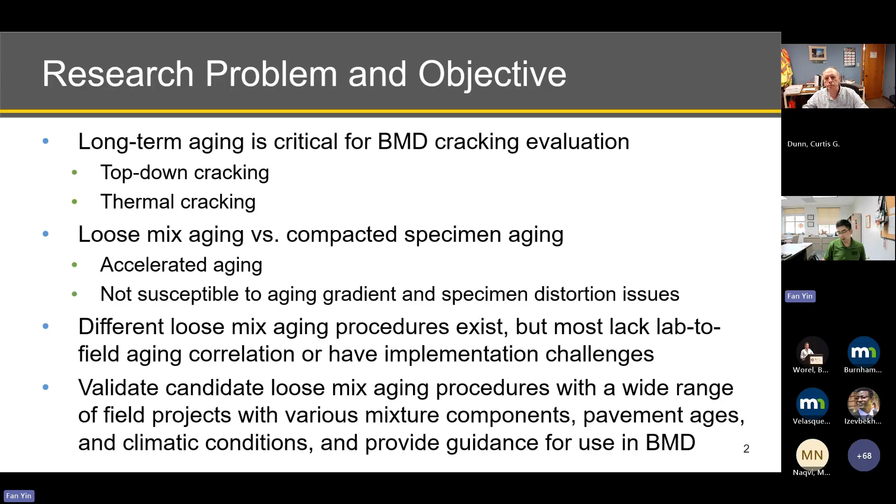I want to mention this is a project we started a few years ago as a phase 1 effort. In phase 1, we started a very comprehensive literature review to identify what has been done on existing loose mix aging procedures in the research community. Then we did a critical review on those procedures to identify the knowledge gaps - what hurdles our industry or community need to overcome in order to successfully and practically implement them into balanced mix design for state highway agencies and the industry.

After that, we came up with a work plan to address those major knowledge gaps that we think are worth investigating. For those of you who are interested, the phase 1 report is already available on the NRRA website. It provides lots of good background information about what has been done in the past and what we think needs to be done in the future to advance the existing body of knowledge on this topic.

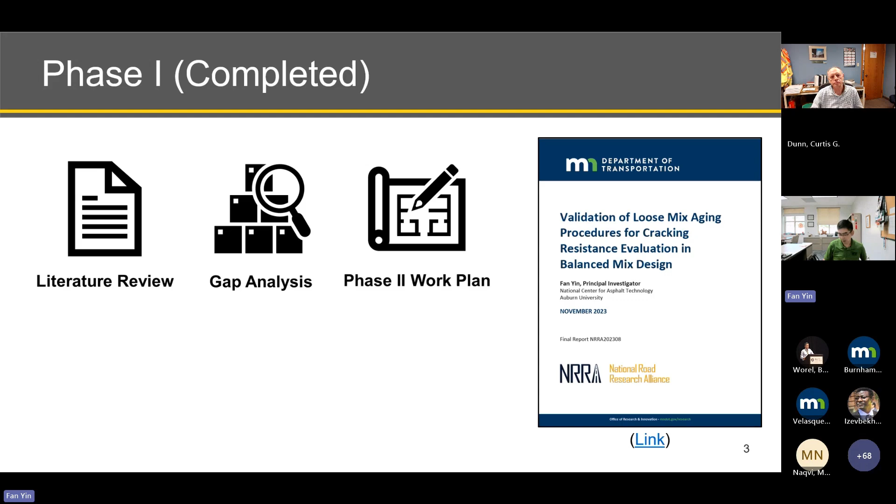Phase 2 started about a year ago. For phase 2, what we decided to focus on is really to look into what we call the conversion of different loose mix aging at different aging temperatures. And I'll explain why we think that is important.

A few years ago, NCHRP 09-54 was completed. That was a great research project conducted by Dr. Richard Kim and his team at North Carolina State University. Through that project, they recommended loose mix aging at 95C to really address the long-term aging effects for performance testing of asphalt mixtures.

Based on our critical review of that procedure, that is the most robust aging procedure in terms of field validation because they were able to incorporate over 35 different asphalt mixtures from 10 field projects across the United States. So they have lots of actual field aging data and then tie back to what they developed in the lab. That really provides a linkage between lab aging versus field aging.

But one issue or limitation with that procedure is sometimes it requires a long duration. It really depends on where you are. In some cases, it could require aging the mixes for over a week. Once again, I mentioned for 5 days it's challenging, and then let alone we're talking about 7 days or even longer. So it makes it a little bit challenging to incorporate into a balanced mix design, especially during production type efforts.

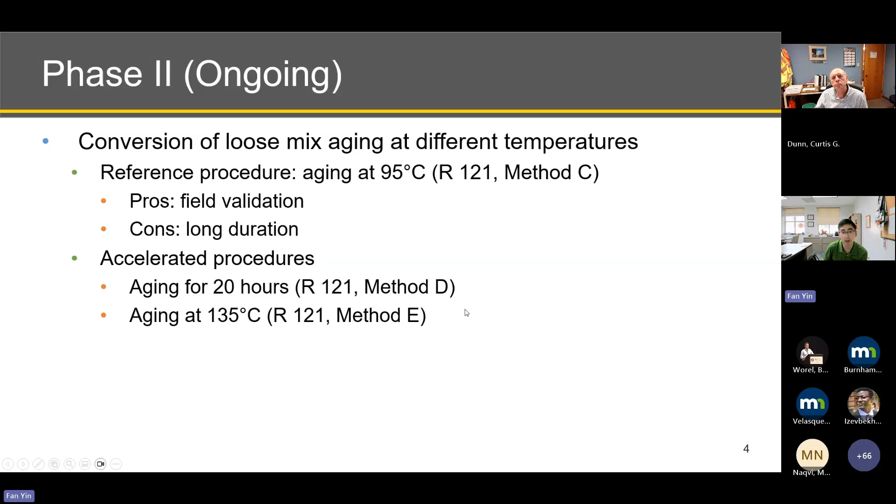But like I said, some of the aging procedures, especially method D and E, do not have enough long-term field performance data to do the validation. So those are the challenges to implement them into balanced mix design.

So that's where the research team said, hey, maybe there's a way we can leverage the connection between the reference aging procedure and the accelerated aging procedure using an aging kinetics model. What I'm showing here is the basic equation that tries to predict how binder stiffness evolves as a function of aging. It is a very significant advancement in aging research.

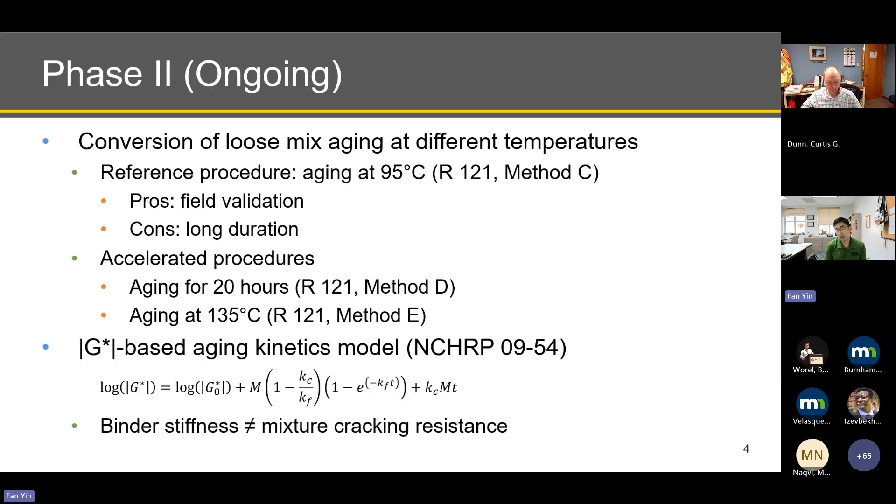But one thing we recognize by looking into that is that binder stiffness matters in terms of cracking resistance, but it is not the only factor that can indicate cracking resistance. Because the relaxation properties of the binder could also affect mixture cracking resistance. So only using binder stiffness may not be sufficient to really establish that correlation, but we can use that as a starting point and then recalibrate or readjust that model to make it more suitable for cracking resistance evaluation.

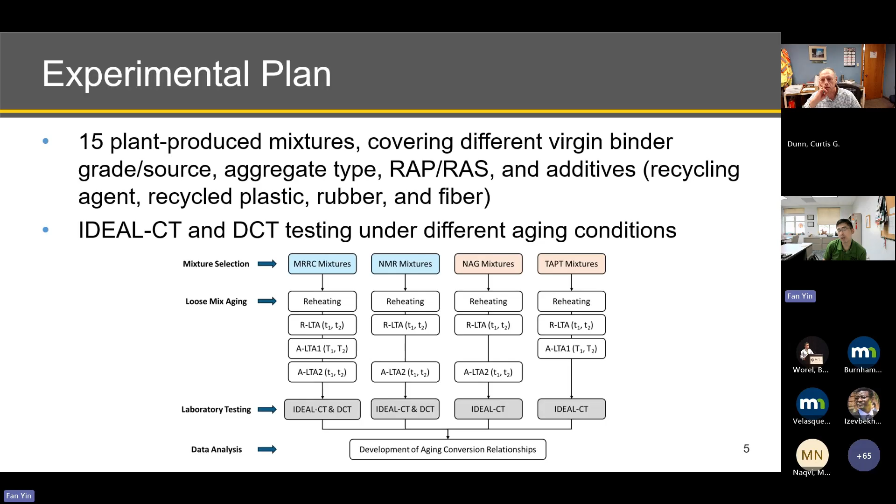And for each of the mixtures, we propose doing the IDEAL-CT and the DCT under different aging conditions. So it's a fairly comprehensive testing plan. For the interest of time for this presentation, I'm not going to go through all the detailed results, but this is one of the most significant findings that we have accomplished so far.

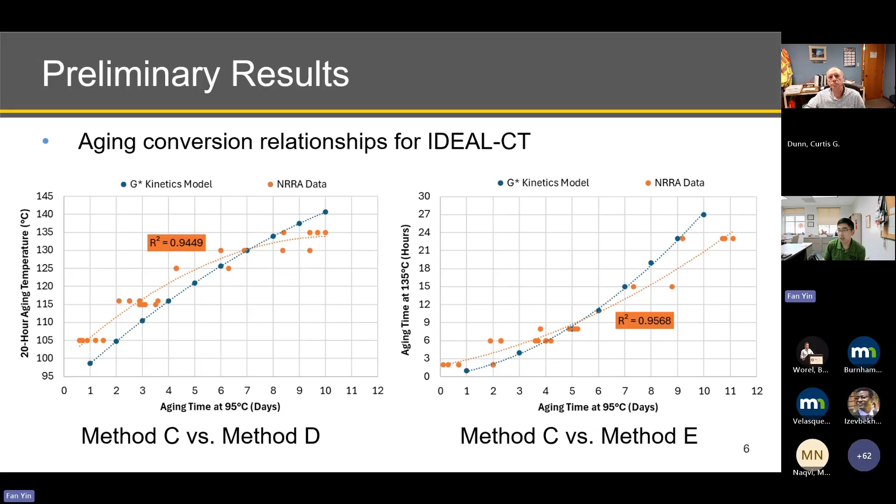We did the same thing on the other side, trying to look into the conversion between 95C and 135C. Overall, we are very pleased with the data, because it definitely shows a very consistent trend showing the applicability of these aging conversion relationships moving forward.

So how can that be used in terms of implementation into a balanced mix design framework? This is just our idea at this point for a given agency, state highway agency, or non-state agencies. If they want to incorporate aging into the BMD framework for cracking evaluation, the first step they need to do is define the target field aging. Are you interested in simulating 4 years, 6 years, or 8 years of aging in the surface of the pavement? You need to define that.

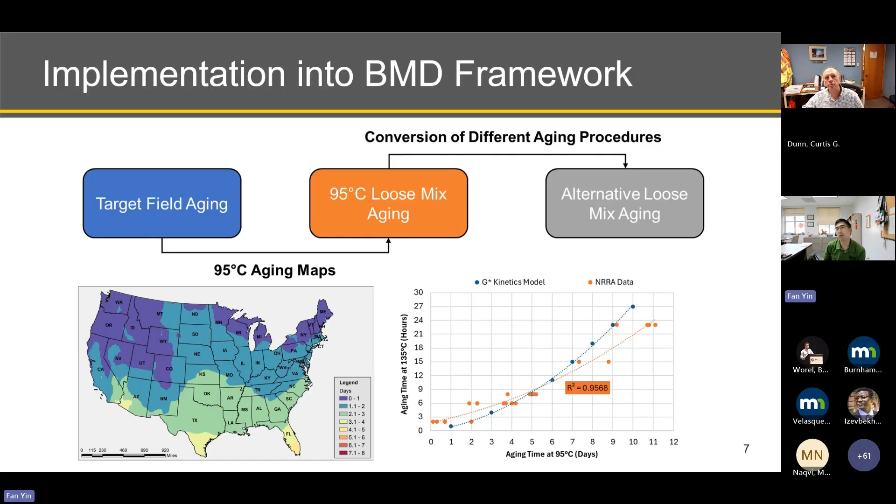In that case, what this project provides is an alternative. You can leverage the aging conversion relationship we established here to allow you to use an accelerated aging procedure that can give you the same, quote unquote, aging level for BMD cracking evaluation. So it's really more about facilitating the incorporation of aging into the balanced mix design framework.

The other thing we have been looking into is the aging susceptibility concept. We talk a lot about additives. In most cases, they do have some performance improvement on the cracking side or on the rutting side. But the other thing that's important to consider is how those additives affect the aging susceptibility of the mixtures. Because at the end of the day, the performance of the pavement in the field is not only determined by the quality of the mix leaving the asphalt plant, it's more about how those properties evolve over time in the field. So considering aging is important, and this data allows us to look into the impact of different additives on aging susceptibility.

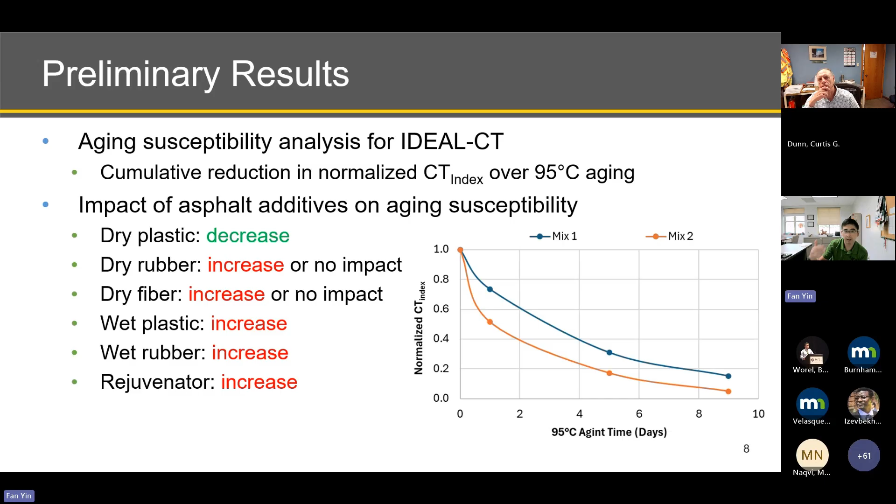So we have been very excited about the project and definitely appreciate the sponsorship of NRRA for this study. We'll be happy to share more information or answer any questions through email, or if there are any short questions right now, I'll be happy to take some.